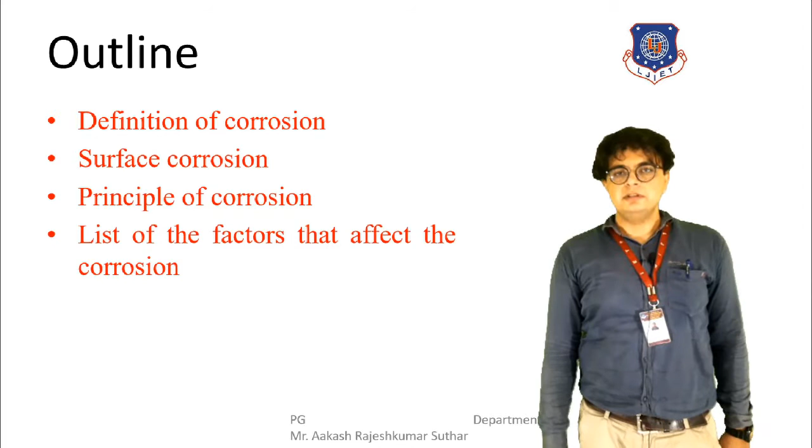Now let's discuss corrosion. First of all, let's see the definition of corrosion. What is corrosion that comes to your mind at first sight? Corrosion is nothing but the destruction and deterioration of the metal, the surface of the metal, because of the chemical and electrochemical effect of the atmosphere. Corrosion is mainly taking place because of the atmosphere only. Because of the atmosphere, the chemical effect takes place and also the electrochemical effect takes place. This is how corrosion used to take place. This is a general definition of corrosion.

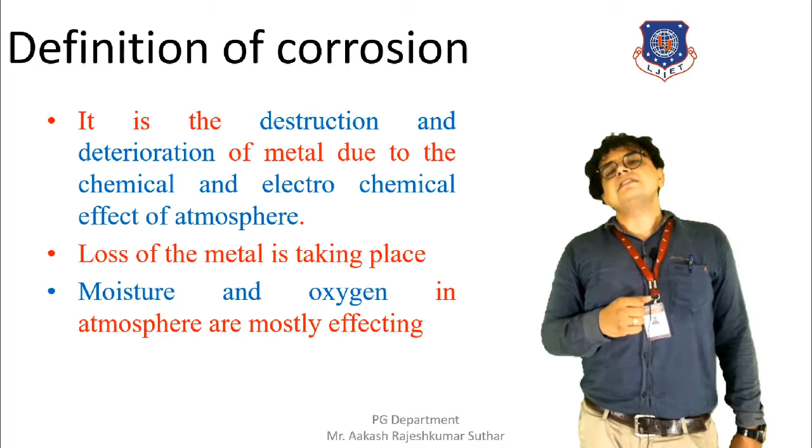Precisely speaking, this corrosion, the surface corrosion, is mainly because of the action of the hydrogen. Surface corrosion takes place due to the hydrogen atom. Let's have further discussion on the surface corrosion.

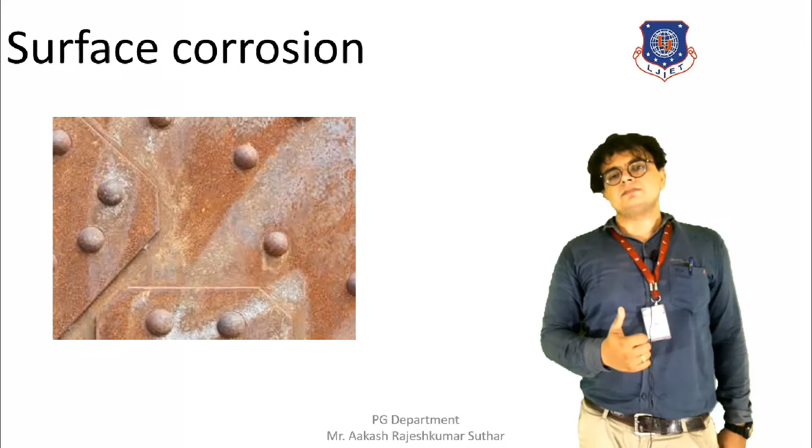So, mainly the surface will get melted once it comes in contact with the atmosphere. Or we can say that whenever corrosion takes place, the melting of the surface takes place. This is mainly because the surface is being exposed to the acidic environment.

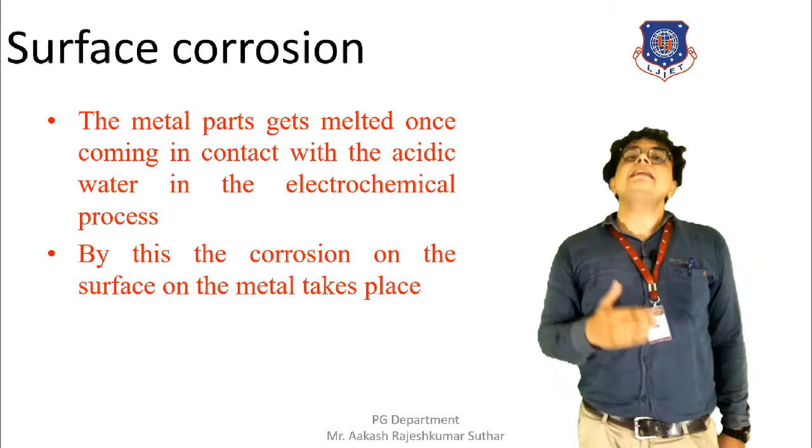And whenever the acidic water comes in contact with the metal, the electrochemical process starts and accelerates, and as a result the surface corrosion takes place and the metal gets corroded. We have seen in the previous slide also that a metallic surface was there, and that has got corroded.

Now, briefly speaking, the surface corrosion is mainly because of the hydrogen atom. In the electrochemical process where the corrosion is taking place, the hydrogen atom will accumulate on the surface, and as a result the gathering of the hydrogen atom takes place. Whenever the gathering of hydrogen atoms increases on the surface of the metal, it will reduce the intensity of the corrosion.

The process of the corrosion will get slowed down once the hydrogen atom starts gathering on the surface. And once it has totally been covered by the hydrogen atom, we can say that the surface corrosion has taken place. So this is the proper definition and proper process of the surface corrosion.

Accumulation of the hydrogen atom on the surface, increasing and gathering of the hydrogen atom on the surface, by which the corrosion process slows down, is nothing but the surface corrosion. This is how the surface corrosion takes place.

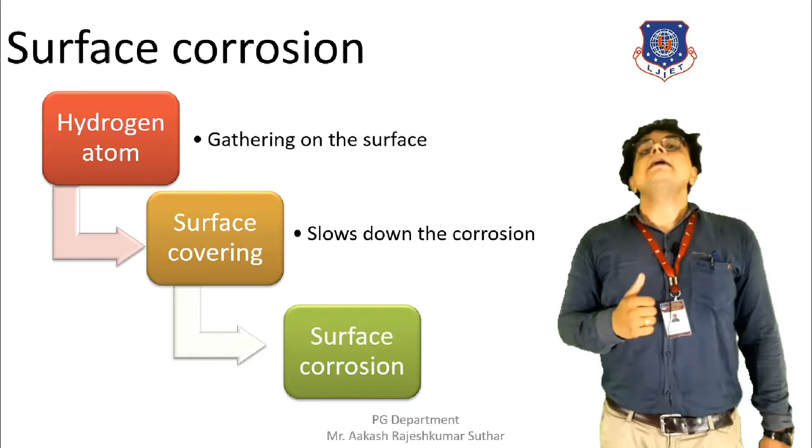Now, let's discuss the principle of the surface corrosion. The principle can be properly understood with the help of an electrochemical cell process. In this electrochemical cell process, we are using a zinc rod as an anode and a copper rod as a cathode.

Both the electrode rods are dipped into the water, and we are providing DC current. One end will be connected to the anode, the zinc rod, and the other end to the cathode, the copper rod. By passing the current, the overall process of the corrosion can be observed.

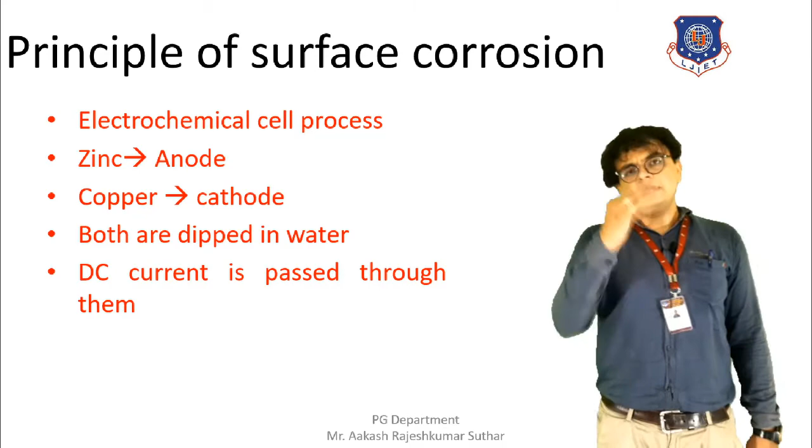So let's discuss the process of the electrochemical cell. In this diagram, the anode is dipped on one side and the cathode on the other side. We have the electrolyte, and in this case we have used water. The electric current is applied to the overall arrangement of the electrochemical cell, and the flow of ions will take place accordingly.

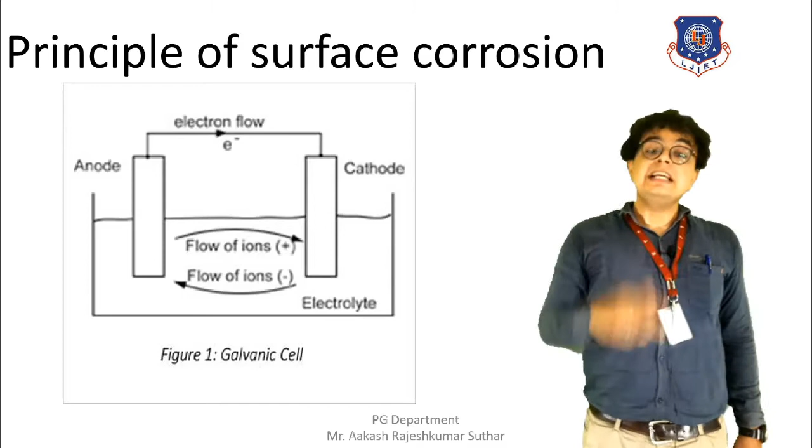Now, let's see how the flow of the atom or ion takes place. Moving towards the anodic reaction, the positive charge is denoted by capital M. M will dissolve in the water and move out, and the electron will also be liberated. Here we can see the reaction is M giving M plus and electrons.

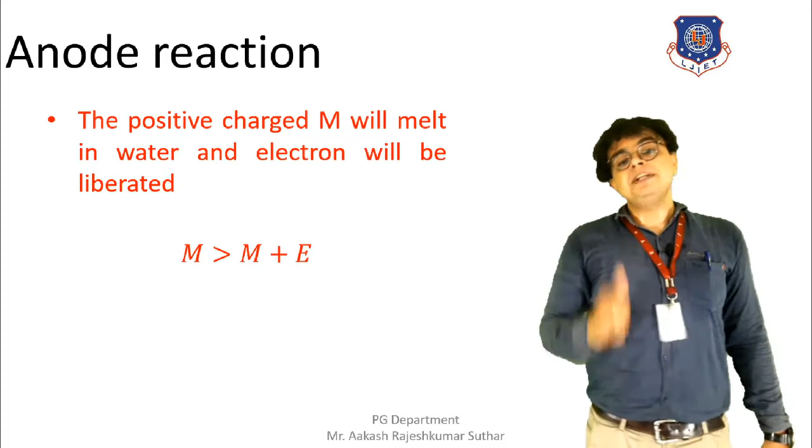Now, moving towards the next reaction, the cathodic reaction, which takes place on the copper rod. Here the hydrogen atom will be accumulated. M moves from the anode to the cathode, and as a result hydrogen ions with a positive charge are generated. We also have electrons moved from the anode to the cathode.

This transfer of electrons towards the cathode will neutralize the reaction, and ultimately we get H plus plus e equals H, and H will be atomic. So this is the cathodic reaction. The electron generated on the anode is transferred to the cathode, which stabilizes the reaction, and as a result we get stabilized hydrogen.

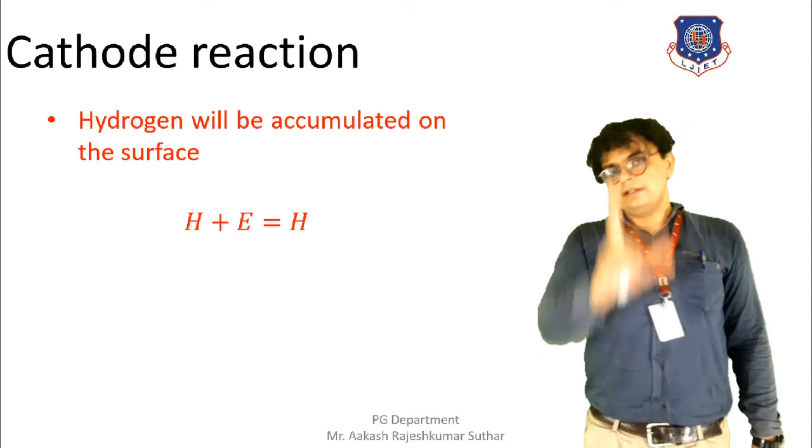Now let's see the overall reaction. The overall reaction will be M plus OH gives MOH.

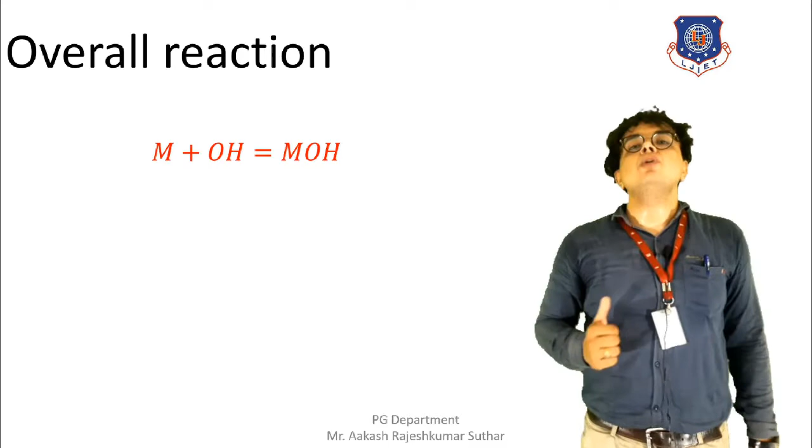Briefly speaking, the hydrogen atom will be stabilized at the cathode, and the M, that is a positive charge, will be moved out of the anode. So that M positive charge will be removed, which means some area of the anode will be reduced, and as a result of this the corrosion has taken place. That is what we have seen in the earlier slide also, that the reduction of the area used to take place.

That is nothing but the positive charge atoms being removed from the anode, and as a result of this the reduction of the area will take place. So this is how the electrochemical cell process is taking place, and this is a very precise example to understand how the corrosion process is taking place. So this was the process.

Moving towards the next topic, that is listing out the factors that affect the corrosion. The first factor that affects the corrosion is the potential difference. Potential difference has a brief impact on the corrosion. The next factor is the moisture and the humidity. The moisture and the humidity present in the atmosphere have a great impact on the corrosion. Hydrogen atom is present in that, oxygen atom is present in that. So both of them have a greater impact on the corrosion process.